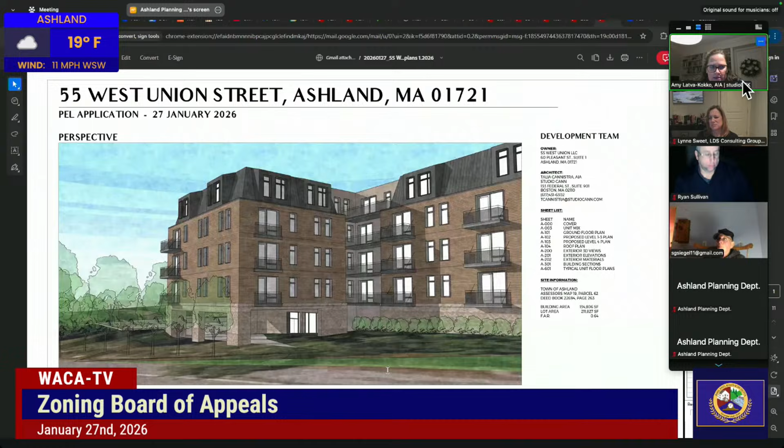I was then able to put together an initial review of the drawing package, which I believe was from March, and go through that with Ms. Cannistra and Ms. Sweet. In order to be able to evaluate the drawings, I needed to request some changes, just to add fenestration, so doors and windows, to understand the plans better. And the fourth floor plan, which is a mansard roof condition with a slightly different configuration, I needed to understand that. So that letter you have in hand is really an initial review to make sure I was understanding things correctly, because there were some things.

So my initial review was really to get the drawings so that we can now take them overall. And those items that I asked for really seem to have been addressed. I can take you through the building as an overview, if that would be useful.

Sorry, I'm looking at the drawings and I've lost you all on my screen. Forgive me for one moment, please. I'm just going to move my drawings to a different screen. Forgive me, sorry about that.

So the existing lot at 55 West Union Street is zoned as commercial highway. And the proposed building is 116 units. 116 units.

116 residential units with 168 standard parking spaces and 6 accessible spaces, for a parking ratio of 1.5. Total gross square footage is 134,806 gross square feet, as you can see on the drawing, with a lot area of 211,827 square feet, which works out to 4.9 acres. And the FAR there, you can see, is 0.64.

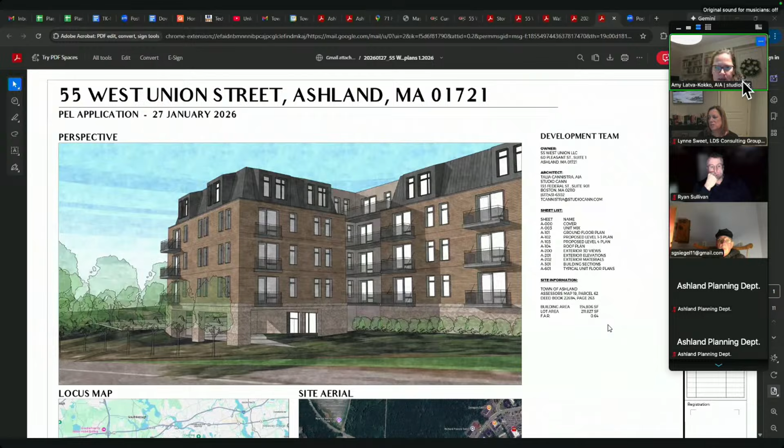This view, if you don't mind, I don't know if it's possible to make full screen, but you can see this view is towards the entry, and we're seeing the drive-through corridor here. One of the amendments we see now is windows in that corner on the 4th floor that hadn't previously been there. We appreciate that's been updated in the drawing, and now the plans make a little more sense to us. This drive-through under-port area is a drop-off area, and this is that half-story, when it said 4.5 stories, this is where we have that half-story zone.

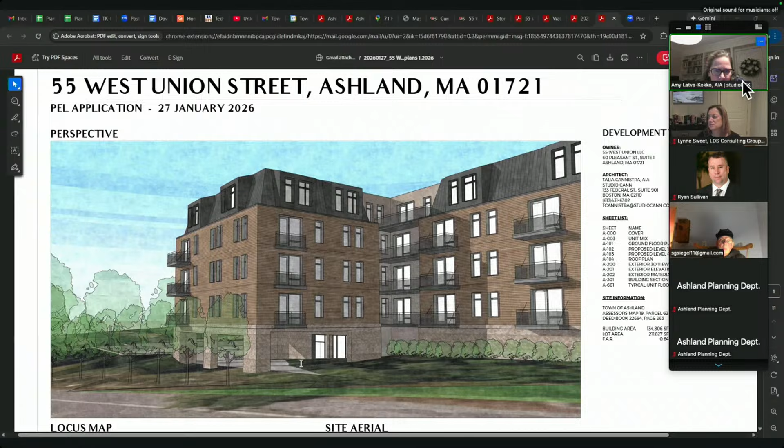Just to be oriented, if you don't mind making it full screen again. We can see from the locus map, the site aerial, and later plans, Ms. Cannistra has added key plans to orient so you can see immediately. Maybe I'd suggest for the public to clarify that this view is from Memorial, and we're looking southeast, exactly where your cursor is, towards West Union. So Duncan is down to our left in this view, just to get oriented.

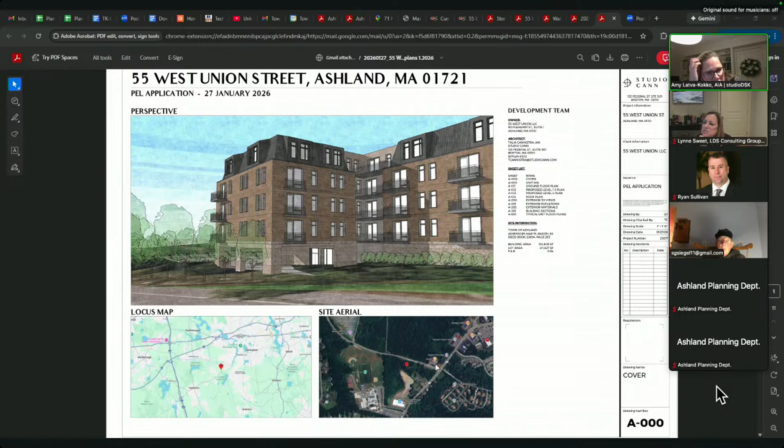If you don't mind going to the next sheet, please. This is the breakdown of the units, and basically each floor has the same layout, except that the fenestration changes on the 4th floor. There is a 25% mix of affordable units, and my understanding is that they are the same number: 25% of the A type, 25% of the B type, and 25% of the C type, for the AMI.

It's noted here that X.1 units at the mansard roof have unique layouts, which could be useful. And note that the project will include 6 units, which is 5%, as required, of Group 2A units in compliance with the Mass Architectural Access Board, that's 521 CMR 9.4. This is an elevator building, so each unit will be able to be visited, and Ms. Cannistra noted that in the letter.

If you don't mind going to the next sheet, please. So this is the downstairs floor and lobby amenities. Note the social lounge area, that's where we have a lot of glass to get light, and that's facing West Union.

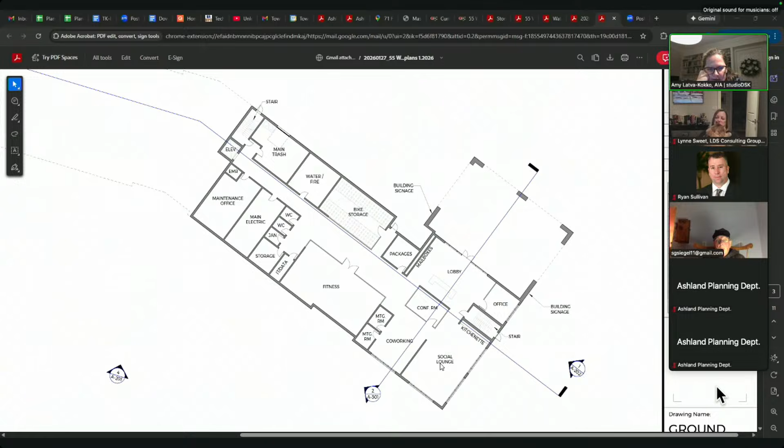You can see the elevator is at the end of the hall, at the upper left-hand side of the building. You can see the egress stairs at the top of the plan and also down at the lower part of the plan. Building signage is noted there. This is the ground floor, the amenity space.

We don't have a site plan here, but the landscape plan, I did receive that last week, and that's not in this drawing set though.

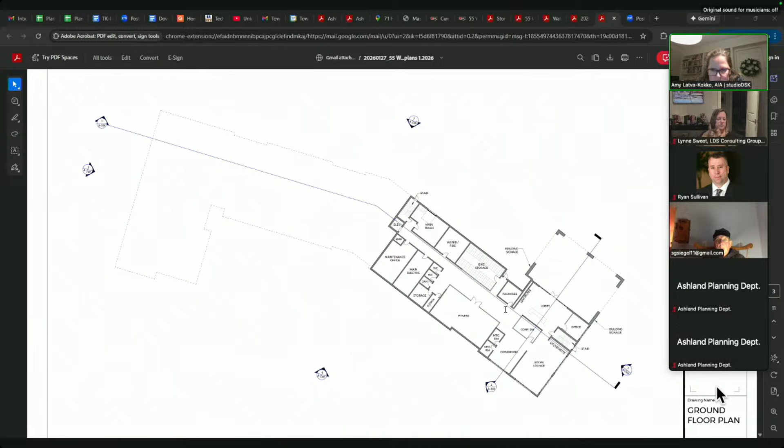One of the things, because I got these at 2 p.m. today, I would love to do a little bit more of a deeper dive. We're going to keep flipping through these drawings and we can ask questions, but I wanted to say I would request if I might have a little more time with the drawings. That would be appreciated. I understand it took a while to get us on board, but it would be appreciated.

If you don't mind going to the 4th floor plan. This is a new drawing that maybe people haven't seen before. This was added at our request because the mansard level, which does help with the articulation of the building, having a different material and having it step in helps reduce the massing of the building. So this is a slightly different floor plan, and some of the window openings shift to provide some variation to the facade. We had requested that this plan be drawn, and it was provided today.

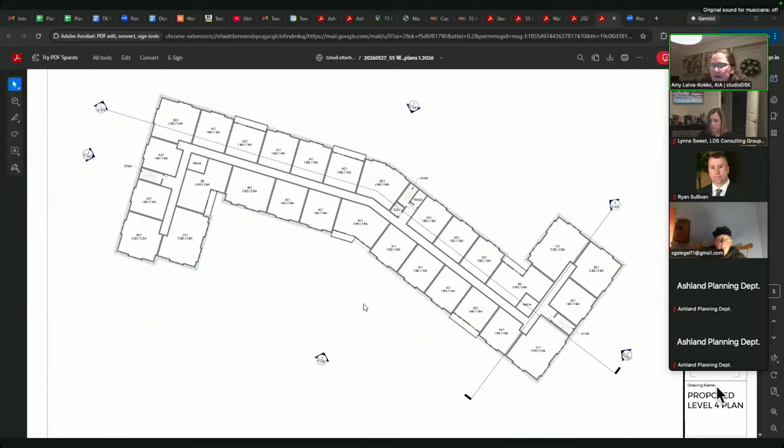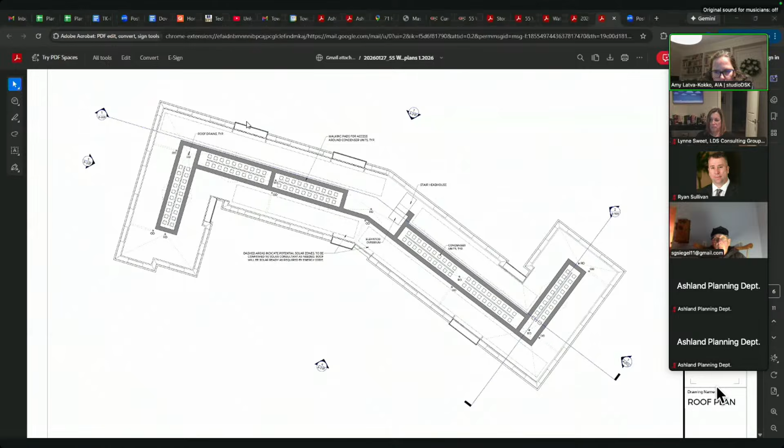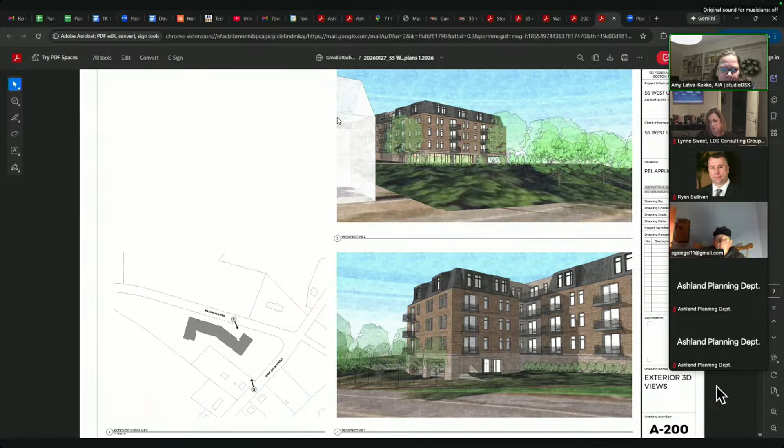But we're glad to see the drawing updates as requested. If I could go to the next sheet, please. Yeah, so these renderings, and the bottom one I see has been updated, so the key plan is very helpful. The neighbor to the southwest, the general construction company, they have a building quite close to the west, to the street, and when you look at perspective 2, the top perspective, you see a ghost of it, that white building, and that's catching that building and then framing it.

One of the revisions we see in this is that the grading is going up, we're seeing it much more steeply, so I just had some questions about the foreshortening of that. I received the landscaping plan a little bit later, so I was wondering about that. But what we're seeing now is an updated 4th floor in the bottom perspective. So both of these drawings have been updated as requested.

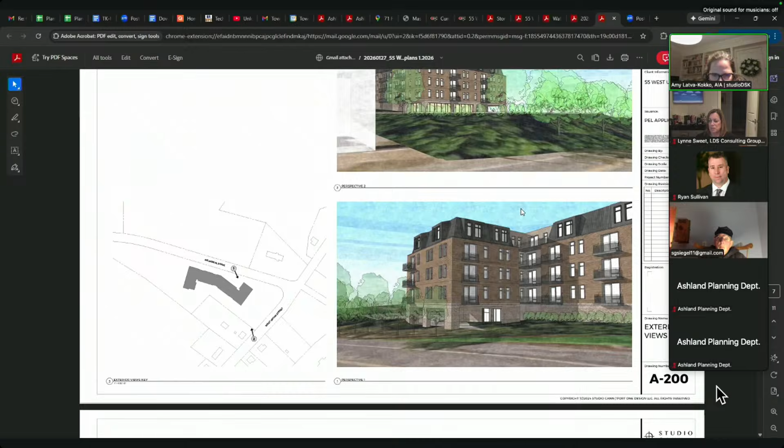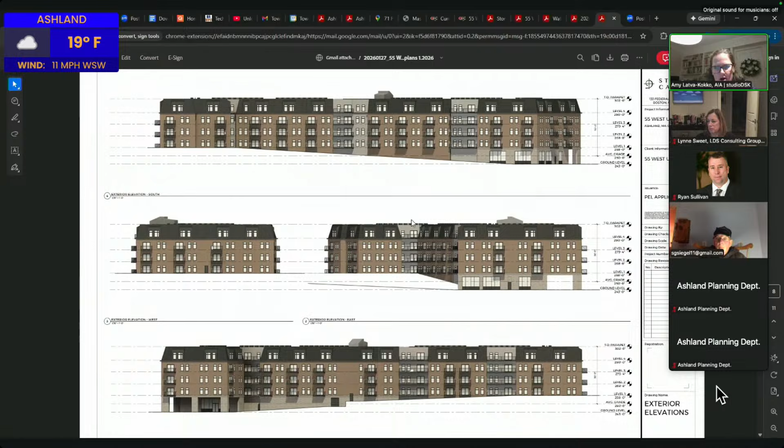If we go to the next sheet, please. The elevations have been updated to reflect additional windows for bedrooms on that 4th floor. Correct me if I'm wrong, but I believe the zones of the building that step back where the balconies are - I'm not sure if they were a different color before, but I was pleased to see the different color, because I think that helps with breaking down the massing. The stepping back certainly helps with breaking down the massing, but adding a different color is helping it also.

From this bottom view, we can really see the halves, where we get that 4.5 stories and where that 52 feet comes from. We calculate it from the average grade. That's a question the architect could speak to, in the highway commercial district, is this height compliant in this district? That zoning area is one question we have.

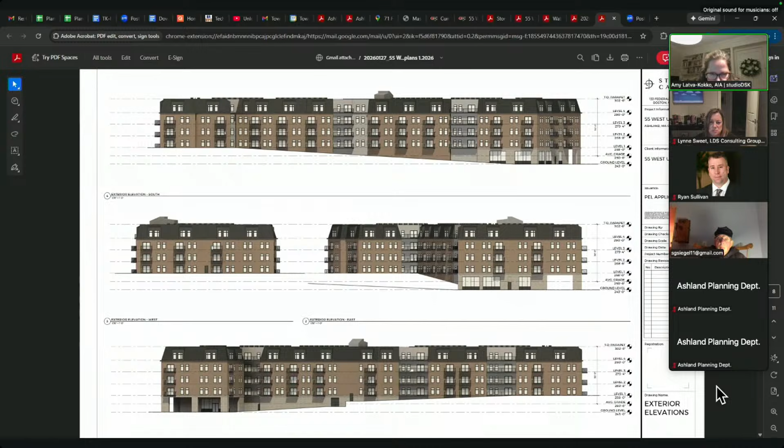If you don't mind going to the next one. This has been updated to reflect some pictures of built installations of these materials, so we can see the fiber cement lap siding in that brownish tone, the mansard roofs with standing seam metal roof expression, and the buff brick, an example installed. We also see the storefront windows, which are those amenity spaces downstairs - the community gathering spaces. And outdoor balconies are provided.

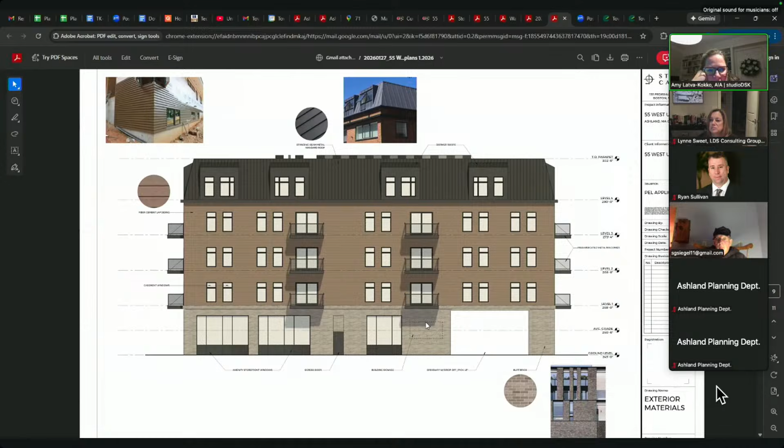One thing that would probably be helpful is to also see that secondary tone being used for the fiber cement siding where the building steps in. One thing we're seeing on the facade is, by having those 3 stories be the fiber cement, and then having the upper one be the mansard roof with shifting windows changing that pattern, it helps break the building down and create visual interest.

If you go to the next page, please. This building section explains that 52-foot height. You see the elevator overrun there also - it goes above that.

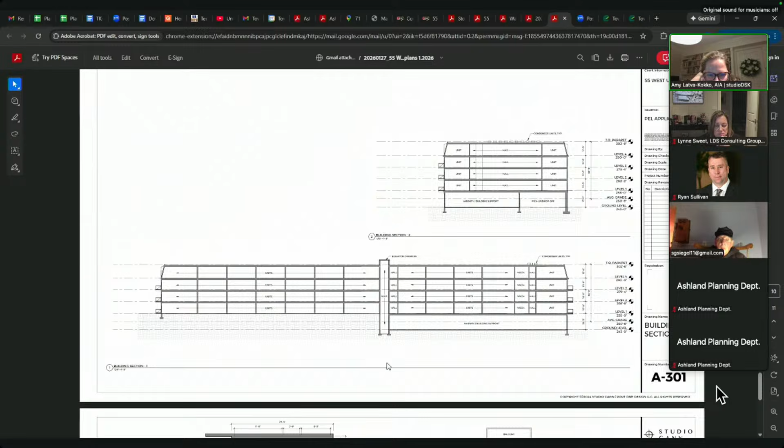Building sections, and then we have some of the unit plans. Not all of the unit plans on this next sheet are depicted, but I had requested one more because this is the one that's new in terms of depiction, and that's the unit where I hadn't seen the windows before, so that's updated in the rendering. We have a 2-bed, 2-bath in the upper left-hand corner with outdoor living space. Each bedroom is provided daylight windows as required.

There is another configuration of a 2-bed, 2-bath on the right, with the primary bedroom on one side of living and secondary bedroom on the second side. On the bottom right plan is a version of the 1-bed, 1-bath, and then we have the 3-bed, 3-bath configuration. So these are the updated drawings - thank you for sending these through.

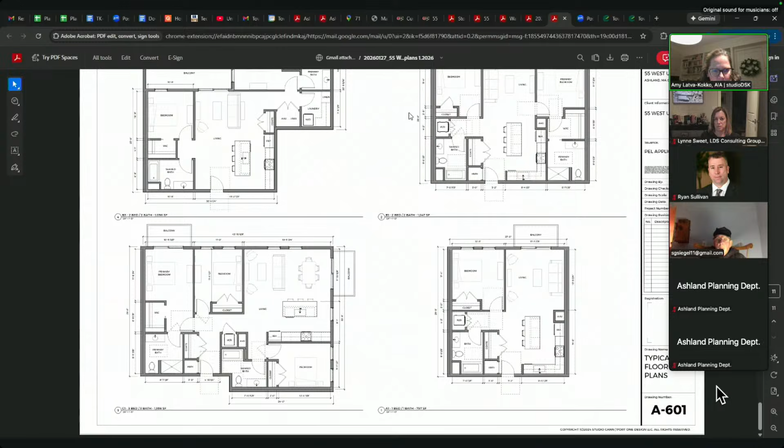I just have some initial questions from this quick review this afternoon, and would love to ask some initial questions. Is the 52-foot height compliant?

This is a 40B, so we are allowed to ask for waivers from underlying zoning. Right, but a waiver would be required.

That sounds great, yep, that would be great, because the initial report was an initial report. I got updated drawings that now are a little more ready for me to review. So yeah, that sounds good.

Okay, so would you be able to - is it also fair to say that you don't have the waiver list? They were not listed on the drawings. Okay, I'll send you the waiver list too. Okay, thank you.